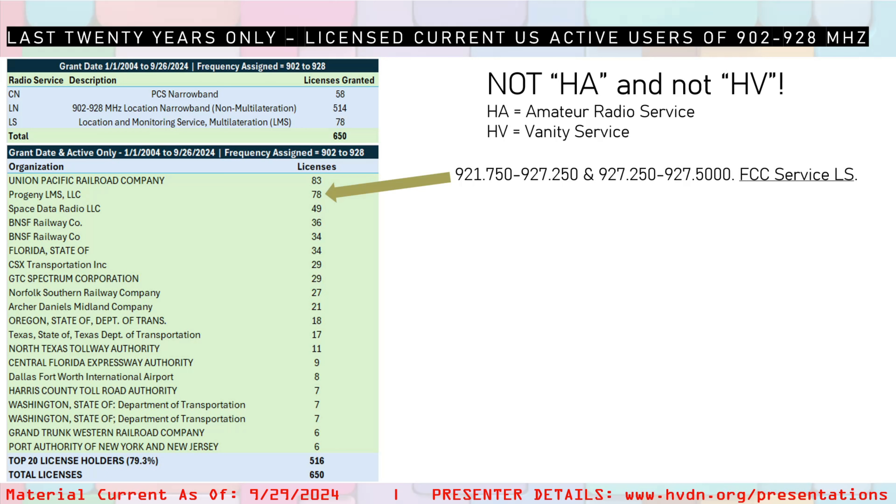And so now if we start to look at some details here, here we have a company called Progeny. They have some spectrum within the 902 to 928. You could look at 921.75 to 927.25 and a little bit higher up in the band. So they're known as using FCC service LS, and they currently have 78 licenses of the total 650 license holders.

Matter of fact, of these ones that we see here on the screen, these are the top 20 license holders. And so of the 650, 516 of them are actually held by just these 20 companies. And that represents almost 80%. And so here's a bunch of organizations that do have some special characteristics for what they're actually using devices for. So again, these are the license holders. These are not the companies that manufacture equipment. These are organizations that utilize it and have requested specific frequencies.

And so then we have another example here with a company called Space Data Radio. They're outside of the 902 to 928 spectrum. They actually got triggered because when I ran the search, I did 902 to 928. So that's exactly why Space Data Radio came up. But I still think that it's really important to show this, that we have two different examples here.

We have one company that is commercial that wanted to utilize their services within this multi-user spectrum. And then we have another company like Space Data Radio who said, we don't necessarily want to potentially have interference or create interference for others. And so they opted to get spectrum just outside of this chunk. And then there's another few license holders that just have 2 licenses each. But again, the point here is there's 3 major users of license services in this spectrum.

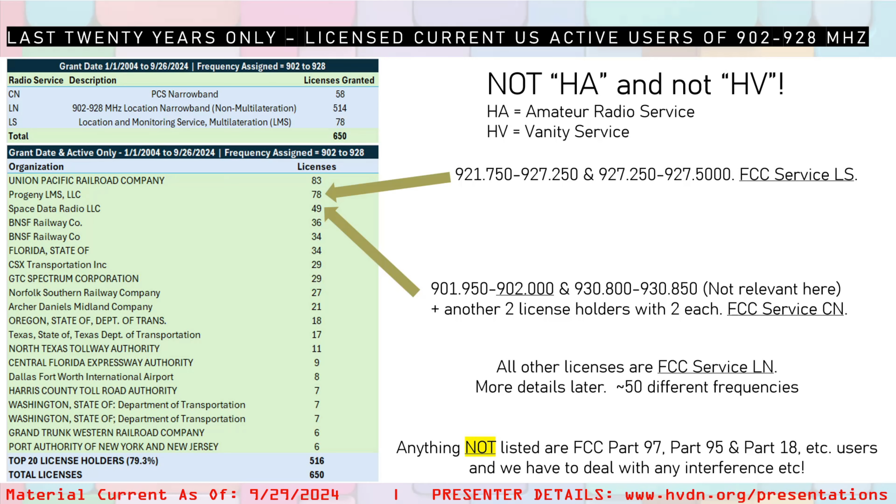So there's all these random ISM devices, which we saw were those 25,000 different devices that have been manufactured by various manufacturers. Then we have the things that are licensed, and then we have things that are using licensed equipment on specific channels, and we'll talk about something like the Things Network a little bit later, as well as Meshtastic.

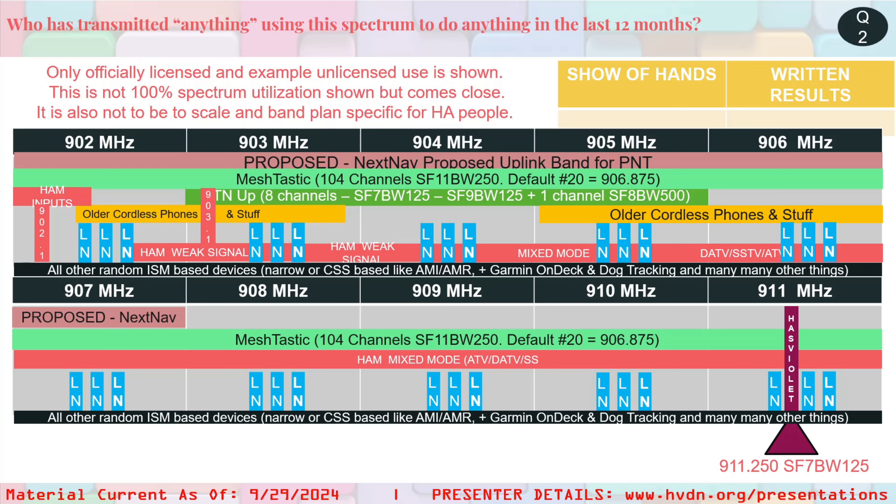So again, as you kind of look at this slide, as we get into like the 909, 910, 911, it seems like it's less busy. And actually, a couple of years ago, and I'll come back and talk about this later in the presentation, myself and a few friends, we started to look at this and said, you know what, if we're going to experiment as amateurs, we want to find a nice quiet spot. And so we started to gravitate some of our own experimentation as licensed amateur radio operators on a secondary spectrum basis. We chose to experiment around the 911.25 area. And I'll explain a little bit more about that later on.

So here we'll just kind of start wrapping things up on the commercial side before we start talking specific to amateurs. Here's an example for organizations that have specific licenses specifically at 915.00. And so many organizations will refer to the 902 to 928 band as 915. That doesn't necessarily mean that everything's using 915, but believe it or not, there are license holders, and we can see some examples over at left.

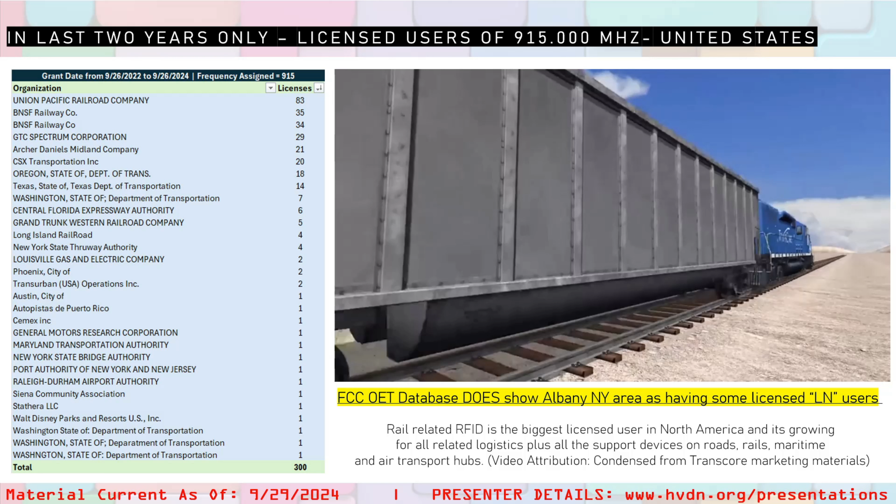These are just in the last 2 years. So from September of 2022 to present, there's over 300 license holders just in the last 2 years. It's actually quite more if we go back 20 or 40 years. But for the most part, I feel like just 2 years to show that there's 300 new or recently renewed license holders shows that this is in demand by the commercial world.

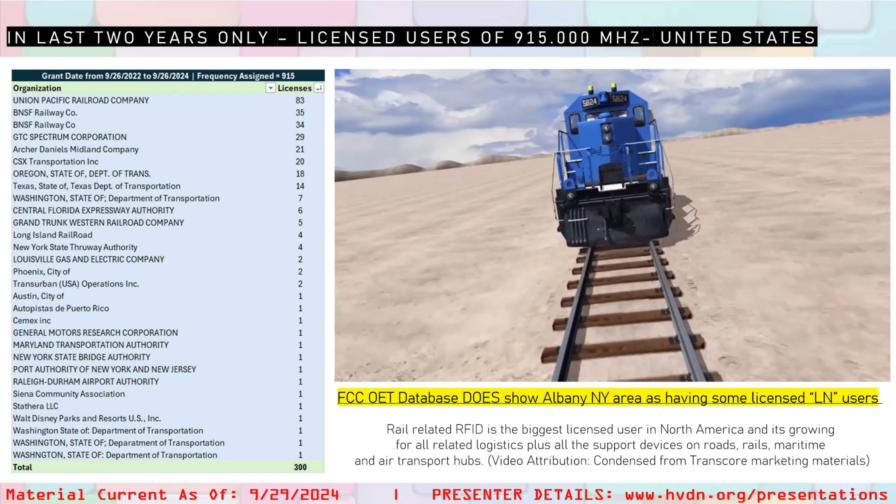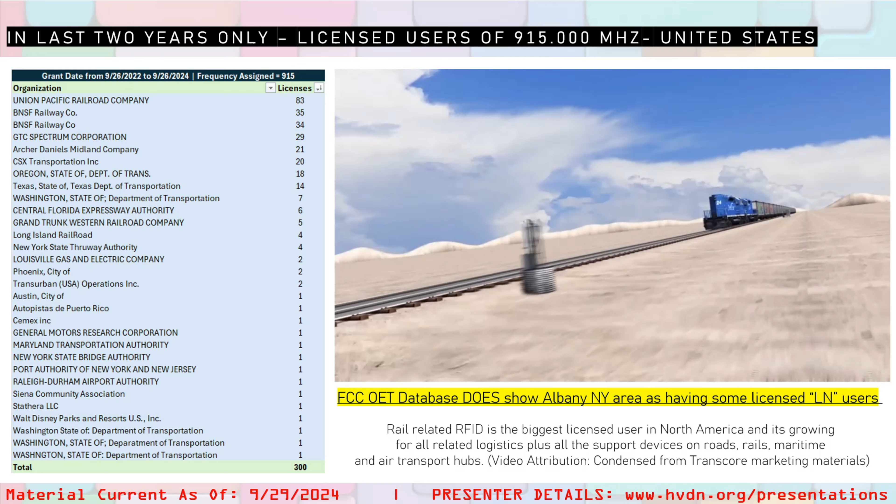And so I'm not going to let this video play all the way through. I mainly use this for the live presentation. But if anyone's ever kind of wondered what exactly are railroads using the spectrum for, I found this video from a commercial company named TransCore. They are a very well-known and reputable vendor of equipment used by the rail infrastructure. And as we can see through the video, we see a train passing through with different tags. This is an international standard now.

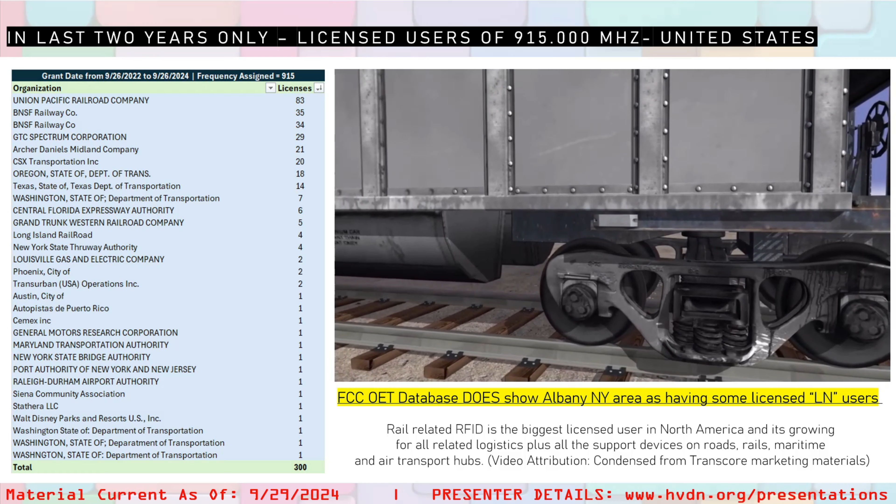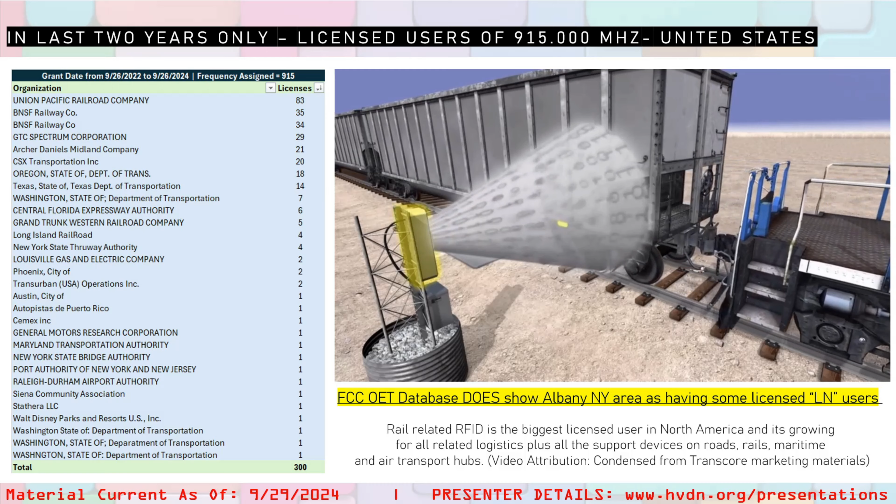They take their transponders, they attach them to rail cars. So there's over 1.6 million rail cars, again, as a reminder, in the US. These are transponders, so these are devices that they attach to a rail car. And as we see, once it goes past an infrastructure, it scans it, and it is able to read the information that's been encoded on that transponder. And so this is really helpful information because it gives details on what's the cargo, what's the weight, where its destination is, and it routes it up to the cloud.

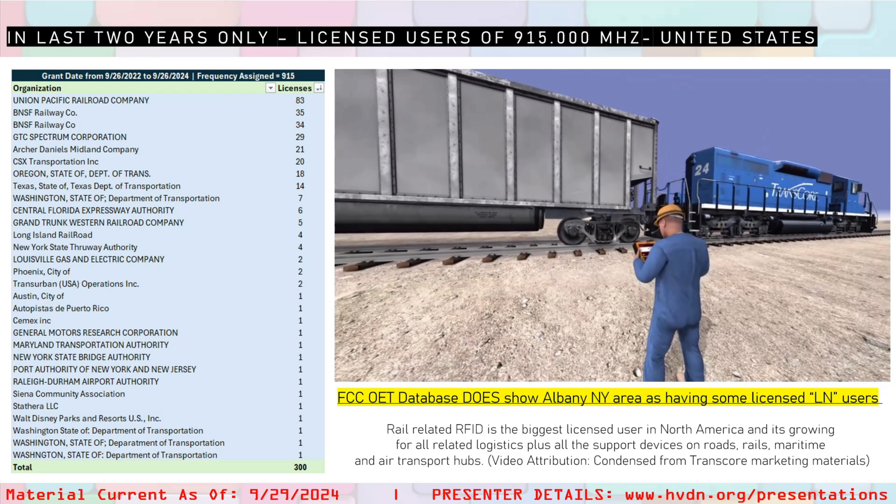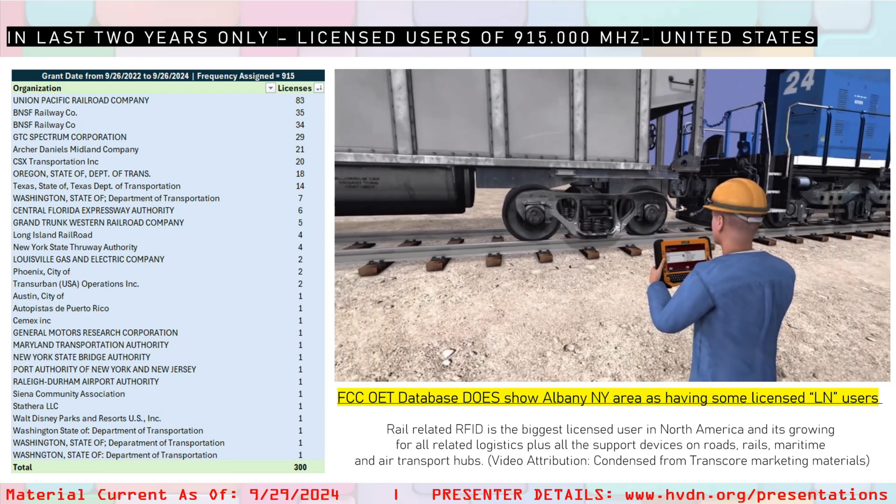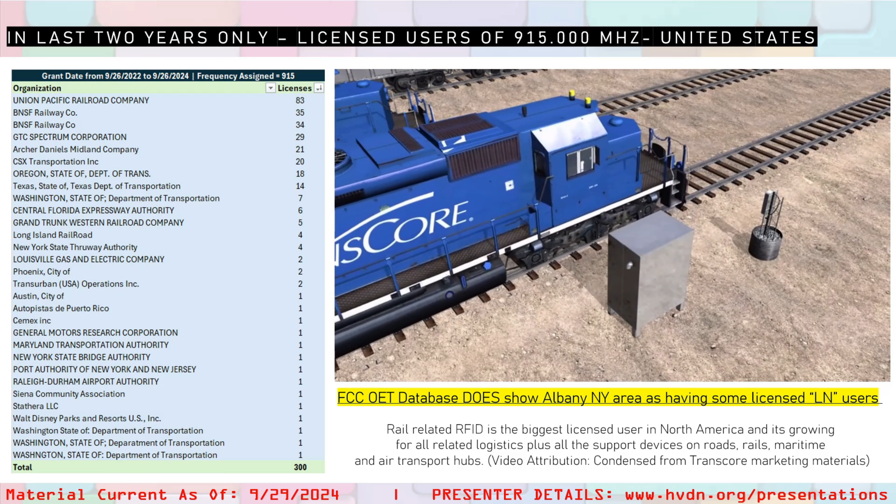Then we also have an example where maybe there's a maintenance worker. He has a terminal that he can do the same thing. He can read the information on a rail car to determine things that may actually be helpful for maybe some predictive maintenance, as an example. And so now we have 3 different types of devices. We have devices that attach to rail cars. We have infrastructure devices that are on land, like again we have here, as well as devices that are going to be held and used by people.

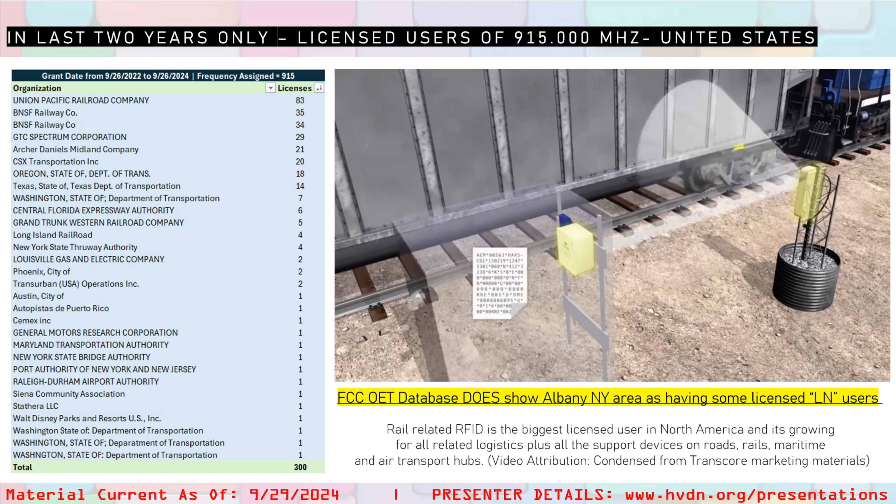This is interesting because here we have an example of a commercial company who's using unlicensed frequencies, but the value is, as we see, there's specific frequencies. This makes it very easy for a consumer, and let's call the consumer a farmer. Maybe the farmer wants to have some type of a sensor to know if a gate is open, or to monitor soil acidity or water levels. So there's many different sensors that you can connect to a transceiver, and then you could use the transceiver to talk back to a gateway, and then you could run all sorts of analytics.

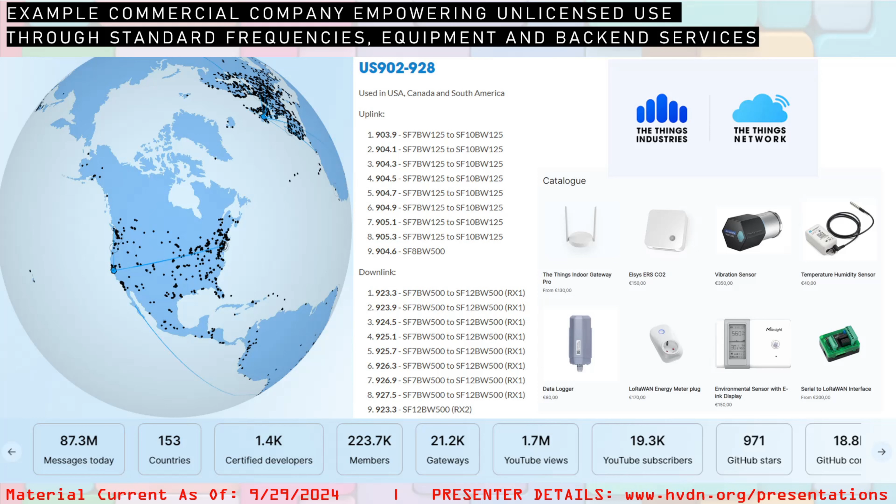And by the way, before we move on, TTN in the United States uses this spectrum. In other parts of the world, they're using other spectrum, like the 868 megahertz range. But again, this is a 33 centimeter related presentation, and this is what is authorized for TTN in the United States. Here we have another example of a company called Helium.

They actually did something also fairly unique, where they followed what TTN did with having standardized channels. So Helium, you can buy devices that will work on the Helium network, and it actually uses the same frequencies. So there is some level of interoperability, but there's a few major differences of what the value that Helium network offers. So you can look for more information about them on their own website. I think it creates a really interesting dynamic within this highly sought after spectrum.

And so what I mean by disaggregated, if you're not familiar with that, that means having a cellular network to get access to somewhere, and then doing the last little bit of transport from maybe sensors in the field or some other end user over 900 megahertz. So it combines the two things together.

And then really what makes Helium semi-unique is that they also are using this as a way to do some cryptocurrency mining. Again, you can look into details on that. That's way outside the scope of this presentation. But again, here we have two large-scale networks using this unlicensed spectrum. And so it just creates more users on this that we as amateur radio operators need to be mindful of.

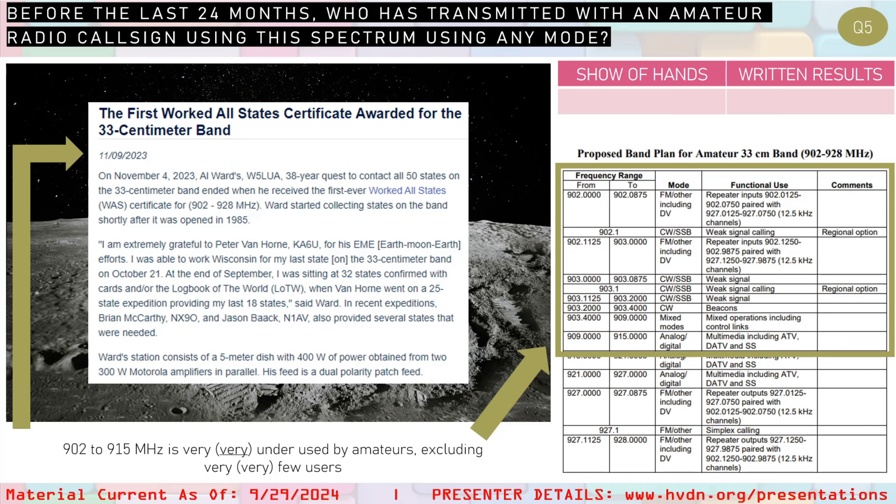But the real key here is he's not using low power equipment. We're talking 400 watts into a 5-meter dish. So that's a 15-foot dish. And so we're talking about some large equipment. So there's very few people that are going to take that level of investment and focus to do things like that. And that's, I think, a really fun way to look at this, where we go from somebody like Al with this amazing accomplishment in the lower part of this band, now we get into something like Meshtastic.

Again, it's not the same scale as bouncing a signal off the moon 200,000 miles away, but it just shows that there's innovation happening in the non-amateur community who want to do cool things with radio. So hopefully the amateur community can learn from those that are just unlicensed, and vice versa. And this is really what gets us into talking about Meshtastic. So before we do that, though, just to give some other ideas, again, these are not specific to 33 centimeters, but there's other technologies that relate to this that would be of interest to amateurs.

And so there's something called automatic packet reporting system. You may have seen some of my previous presentations. Most of this activity uses the same equipment that Meshtastic is based off of, but it is on different spectrum. If you wanted to use a 33 centimeter board instead of 70 centimeter, you can certainly do that. The code is the same, everything is the same, but for the most part, since globally 33 centimeters is not used, the developers behind LoRa APRS have standardized on a few frequencies. So if you want to check that out and experiment, you can do that. And if you want to be extra special, you can take your learnings and maybe even roll that code on a 33 centimeter board if you'd like to do that in the United States.